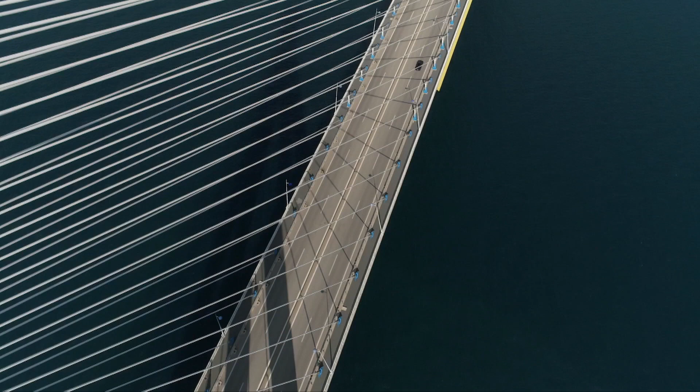Reaching the world on the other side, crossing the bay. First a curiosity, then a necessity, one which has urged man from the dawn of his history to develop construction methods that enable him to cross barriers. But bridges are more than just technological feats. They are links between men.

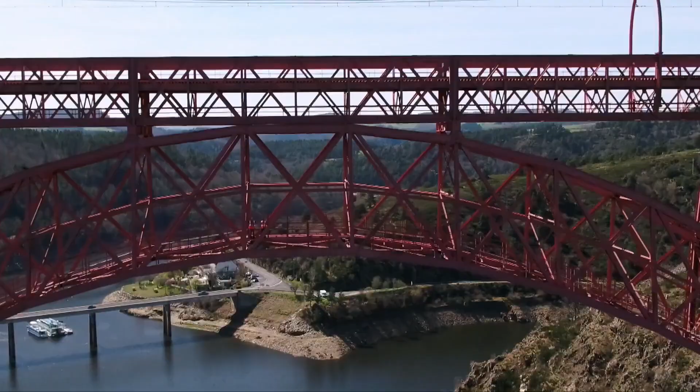Leah Bello is a geophysicist. She'll be following in the footsteps of exceptional builders, revealing the secrets behind the construction of iconic works, and discovering the challenges faced by engineers who build even higher and even further.

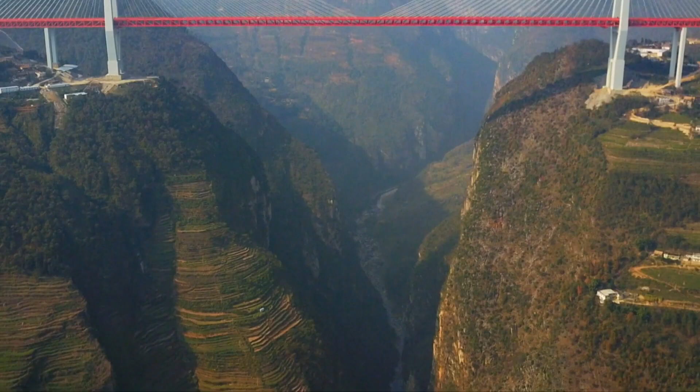No engineer in his right mind would have chosen this place to build a bridge. Unfortunately, that was where a bridge was needed. A scientific investigation to discover how men design and construct civil structures. True expressions of human genius to bridge the gap.

Leah Bello first heads to northeast India and the state of Meghalaya to discover a hidden treasure. Located on the border with Bangladesh, a third of the state is covered by dense, damp forest. Numerous streams wind through the valley, representing obstacles for the movements of the villagers. For almost 500 years, they have intelligently tamed nature by building bridges, using the roots of living trees.

Be careful, it's very slippery. Slowly. Here is the bridge for you, the living root bridge. See the roots. It's like something out of a fairy tale. Is the bridge still in use? Every day. Every day we have people living in the village on the top. They come through this to go to their garden.

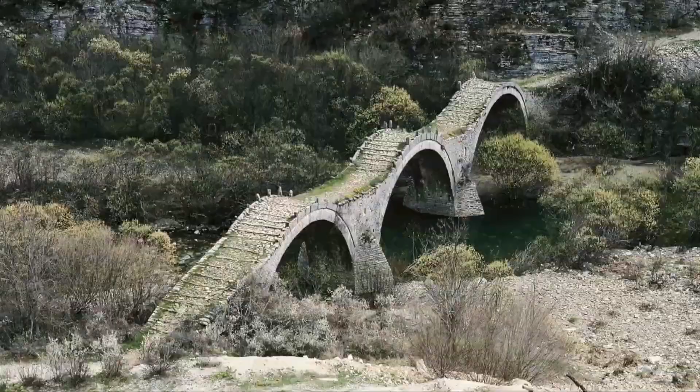For almost 5 centuries, the Roman Empire reigned over Europe and the Mediterranean. To expand their territory, the Romans developed an important network of roads and bridges. This construction-minded people built numerous large-scale structures in stone, some of which are still standing after 2,000 years, like the Pont du Gard in the south of France, which was constructed in the middle of the 1st century of our era.

Its dimensions are impressive, 48.8 meters high, with a span of 275 meters. This iconic vestige is the highest elevated Roman aqueduct bridge in the world. From the bottom up, its 3 tiers have 6, 11 and 35 arches respectively. Vaulting has been used since the Mesopotamian period, but not all the time. The solution discovered by the Romans was to build semicircular arches with centering, with the lateral thrust exerted on piles with very strong foundations. This produced much wider arch spans, from a few meters to 35 meters across.

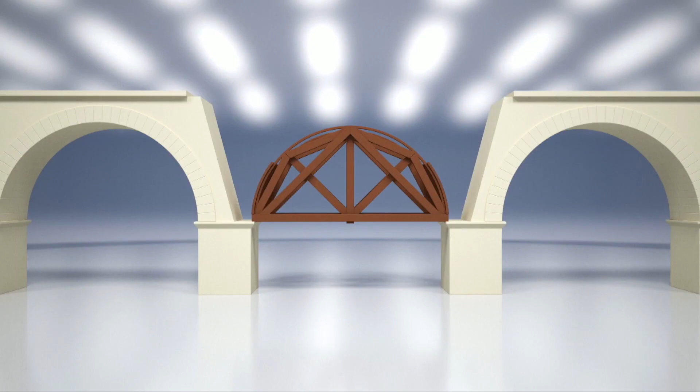Once the piles were sunk into the riverbed, the next task was to construct the archways. The semicircular vaulting forms a structure which can span an empty space with successive arches. To build the arches, a solid support was needed, known as a centering. This constituted 2 wooden semicircles with the same form as the intended arch and served as the framework. The blocks of stone were then laid on top of the wooden centering until the last one, the keystone.

On the first tier of the bridge, the arches were thus formed with 3 parallel sections of stones. This form allowed the Romans to build arches with unprecedented spans. But it did have its limits. If an arch were to span more than 40 meters, the quantity of stone would be too heavy and the vaulting would collapse under its own weight.

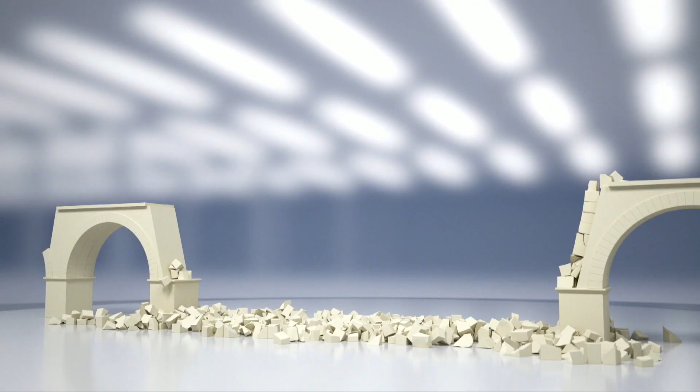It's often said that the Romans were the greatest builders in antiquity. But what do we know about the exact construction techniques and methods they used? We know a huge number of things, but not everything.

Firstly, their construction techniques were absolutely remarkable. Their level of engineering clearly surpassed that of the ancient Greeks, who were also great engineers. And Vitruvius, the Roman architect and engineer, left us the only known book on the subject, which we can now consult for all our studies of the archaeology of antiquity.

Vitruvius was the author of the only surviving treatise on the architecture of antiquity. It's an exposé of the art of Roman construction, and it lists the tools and techniques employed by these master builders. From a theoretical point of view, we learn of their acute sense of proportion. The lines of their buildings form harmonious dimensions and employ incommensurable numbers such as pi or the square roots of 3 and 5.

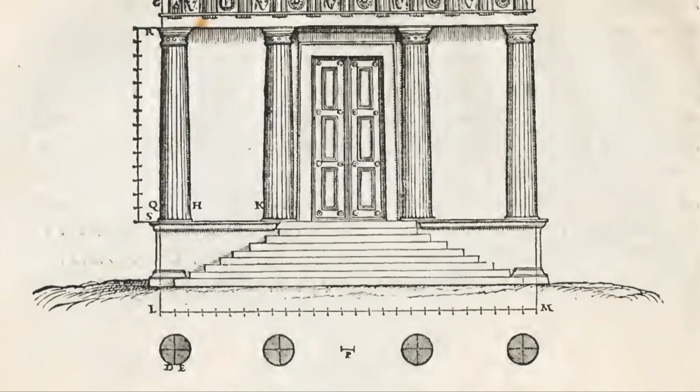The Romans set out to construct for eternity. Their use of infinite numbers actually enabled them to obtain the absolute. And also, thanks to this geometrical system, stonemasons also knew the methods perfectly. And so they could reproduce on the spot, on a much larger scale, of course, the plans which had been drawn by the architect.

While the Pont du Gard remains a model of aestheticism and architectural perfection, it was actually constructed for a very precise purpose: to bring fresh water to Nîmes, one of the largest cities in Gaul, with 20,000 inhabitants. The spring chosen was the Fontaine d'Eure, some 50 kilometers away from Nîmes.

The distance wasn't a problem for the architects, but something else was. They had hoped to find a spring much higher up than the arrival point. But unfortunately, the Fontaine d'Eure was only 17 meters higher. That meant the builders had to construct an aqueduct with an extremely gentle slope, one of the gentlest in antiquity. How gentle was it? 24 centimeters per kilometer.

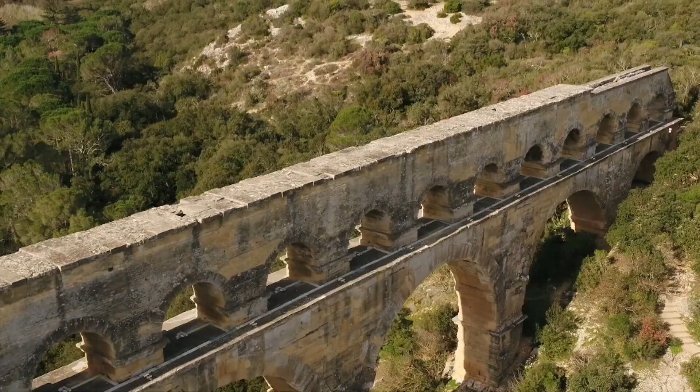A gradient equivalent to only 1 millimetre every 4 metres. And without expert calculations, it was impossible to ensure a regular slope along the full 50 kilometres of the aqueduct, especially across the Pont du Gard. That means that you have a channel with a slope like this, fairly steep, followed by a very gentle slope, and then another steepish one. So in the central part, the bridge, water flowed much more slowly.

So the result is the water rose in the channel, and once the aqueduct was in service, they realized that it overflowed from the Pont du Gard. So the original wall only came up to here, and to stop the water overflowing, they had to build up to here? Exactly. This masterwork of antiquity supplied Nîmes with water for almost 500 years, until the fall of the Roman Empire.

The construction of immense architectural and engineering works disappeared with the Dark Ages and was only resumed 500 years later, in around the year 1000, with the expansion of Christendom and the power of the Church. The builders of the Middle Ages readopted the techniques and methods of Roman architects. Over the following centuries, some bridges were remarkable because houses and shops were constructed on them. Most of these have disappeared, such as the Old London Bridge and Notre Dame Bridge in Paris. But others have valiantly survived, like the Rialto Bridge in Venice and the Ponte Vecchio in Florence.

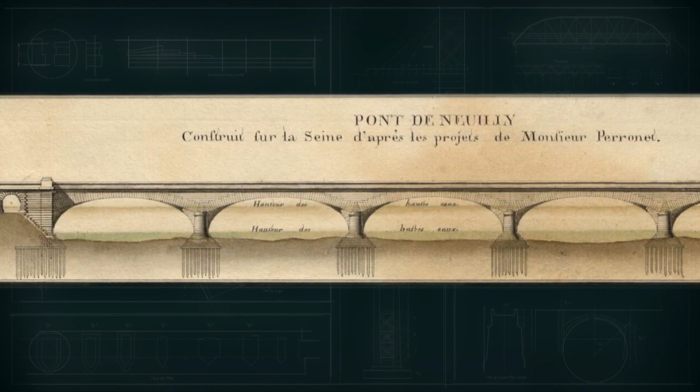He developed an understanding, somewhat systematic one could say today, of how bridges functioned. So he built bridges in a different way to traditional ones. With his bridges, the thrust of each span kept the others in equilibrium, unlike the Pont d'Avignon, where if one arch collapsed, others might yield. The arches of the modern bridge were much more interlinked, and the thrust went from arch to arch right to the abutments. Stone thus dominated the history of bridges until the Industrial Revolution.

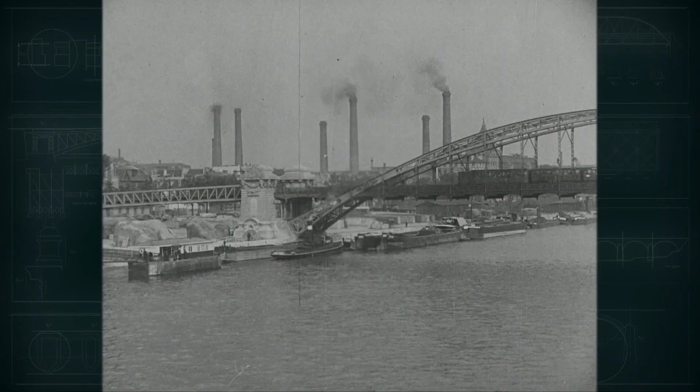In the late 18th century, early 19th century, the mastery of iron allowed engineers to design structures with new profiles. Iron was the great revolution for bridges. It was about 60 times more resistant to pressure and thrust than stone, and that would lead to considerably lighter structures. Iron resisted tensile strength as well as pressure. That meant that architects could finally drop the arch, which had been the dominant form of bridges since Roman times.

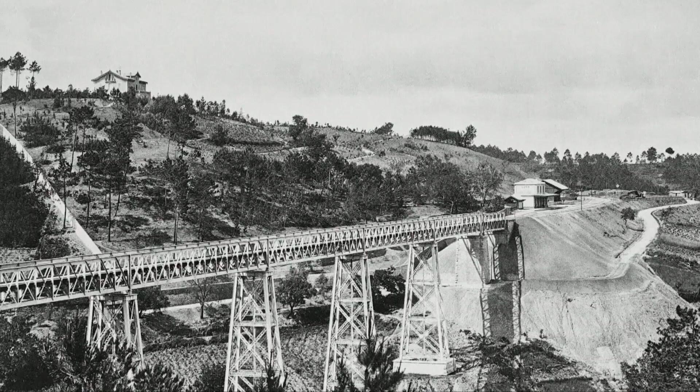Iron enabled builders to construct bridges with triangular crossbars. Both lighter and more resistant, bridges could span even greater distances. The rapid development of the railways demanded new technological solutions to cross rivers and valleys. Engineers stopped at nothing, like spanning the deepest gorges where no one had ever dreamed of taking on nature, and bridging the gap.

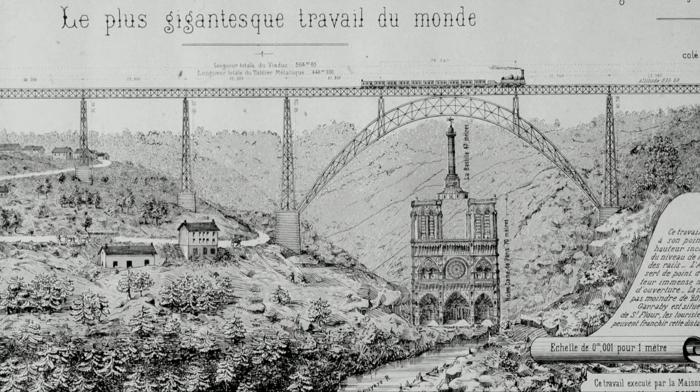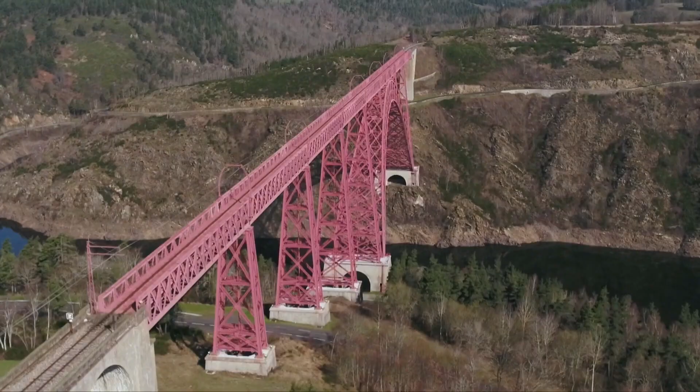The Garabit Viaduct is a striking example of this daring. It was designed by Gustave Eiffel, a visionary engineer and determined architect, whose solid yet elegant bridges reached heights that gave his contemporaries vertigo. Located in the heart of the Massif Central, the Garabit Viaduct crosses extremely undulating terrain. 565 metres long and 120 metres high, the rail bridge rests on 7 piles and a single main arch with a span of 165 metres.

What was there here before the construction of the bridge? Nothing. At Garabit, absolutely nothing. They had to lay new roads just to get to the site. Then they had to construct accommodation for the men who would work on the viaduct. Why construct a bridge where nothing existed? So that the train, with its passengers and goods, could reach the region. As rail was developing everywhere in France, there was still no line through the Cantal department linking Paris directly with Béziers, without skirting around the Massif Central.

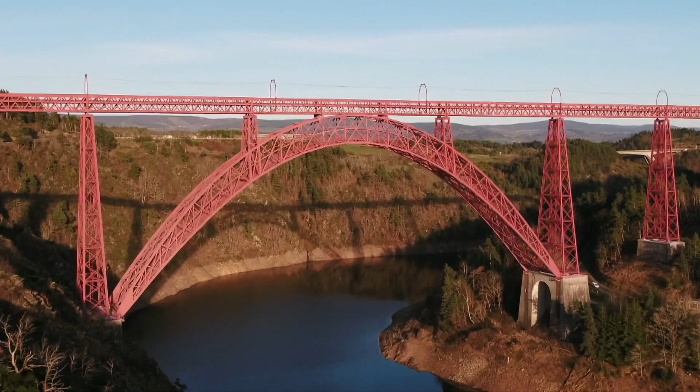Here it is. Wow. The gigantic worksite began in 1880. The viaduct was erected in just 4 years, an incredible technological feat for the time. Keep going. Almost there.

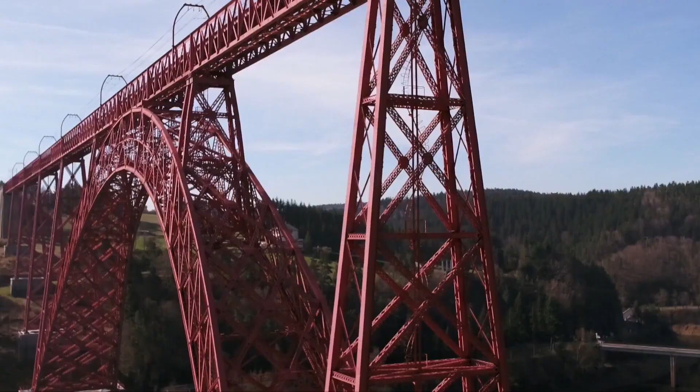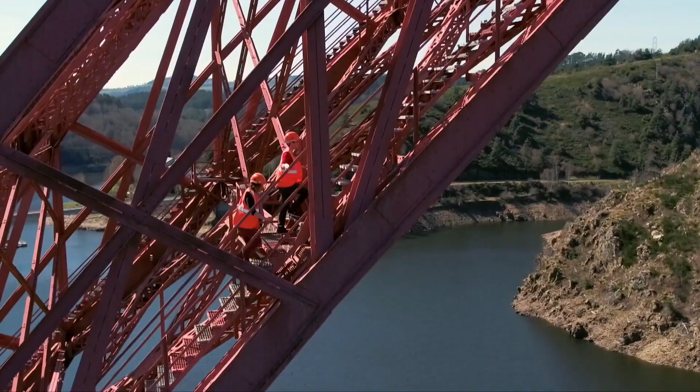The Garabit Viaduct was the testbed for revolutionary technology, and it was while constructing this bridge that Gustave Eiffel patented his famous lattice girders, used several years later for the Eiffel Tower. The structure is mesmerizing. Totally fascinating. And in the signature Eiffel style, with the open lattice girders. Which allows the wind to pass through. That's right. It's a very airy structure.

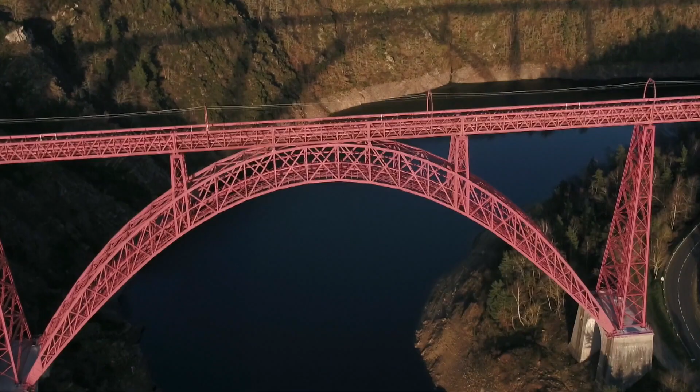How was it constructed? Was the whole thing just assembled here? Half of it was pre-assembled in the workshops in Levallois-Perret near Paris. The other half was hot riveted together here in Garabit. The wrought iron girders were assembled with rivets, these small, shafted iron fasteners inserted between each piece of the structure. Once heated to red or white hot and the tail of the rivet has been hammered flat, they hold the pieces together when they cool.

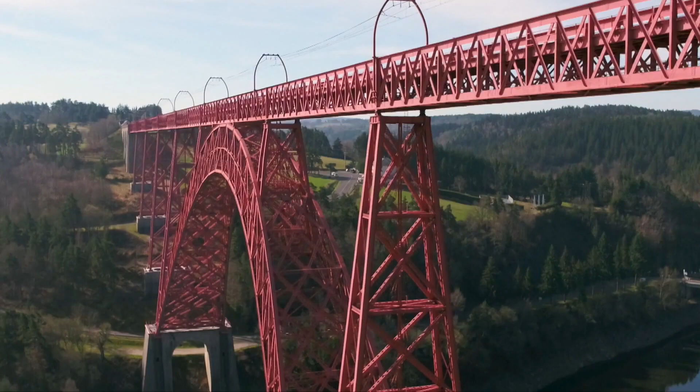Once the bridge was finished, it must have been a huge event for the region. Yes, and not only for the region, but the whole civil engineering world. The bridge was marveled at, due to its height, as far as the United States. It's one of the 2 most talked about works by Eiffel among the 100 he built around the world. The Garabit Viaduct and the Eiffel Tower, erected 4 years later, are testaments to Gustave Eiffel's genius and perfect mastery of iron.

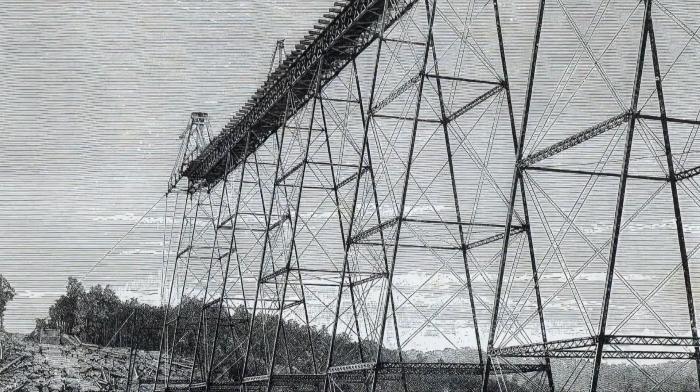Iron dominated the history of bridges in the late 19th century. Constructions multiplied throughout Europe and the United States. But few engineers understood how iron, and notably cast iron, would react over time with the constant crossings of trains. Often hastily constructed, bridges became the stage of some terrifying disasters. In the United States, almost 200 of them collapsed in the 1880s. These repeated accidents marked the end of the iron bridge.

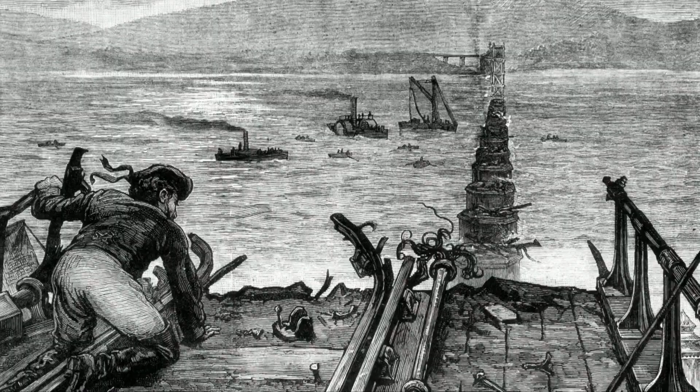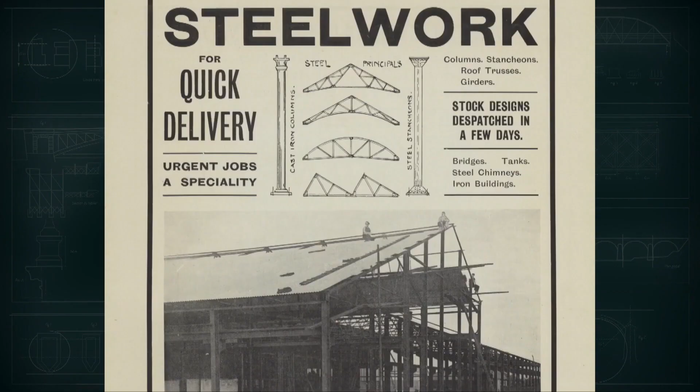Engineers turned to a new, much more resistant material, steel, an alloy of iron and carbon, the development of which took metalwork from the domain of craftwork into that of science. One, high-quality steel has far superior mechanical qualities compared to iron, so you can go much further with it. Two, it had a big impact from the early 20th century on because, unlike iron, it could be welded, and that would totally transform assembly technology. Today, no one would even imagine building a large work of engineering without steel.

Steel opened the door to rapid technological progress. Across the globe, sleek-looking bridges sprung up across rivers, breaking records with spans of several hundred metres, like the Forth Bridge in Scotland.

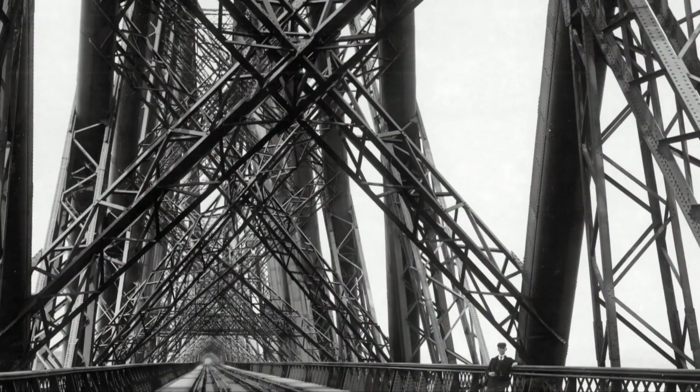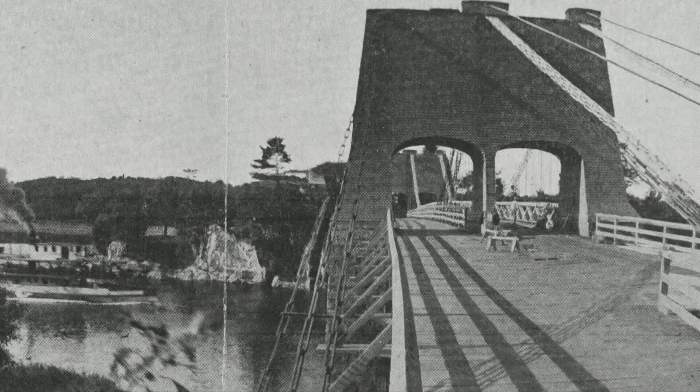Back to the early 19th century, another method of construction was born in the United States: the suspension bridge. Bridges where the road deck is hung below wire suspension cables, firmly anchored in abutments on the riverbanks. The suspension bridge is a very simple idea and it's not that complex to construct. The main thing back then was to make sure the steel used in wire cables was of good quality so that they wouldn't snap. There was a lot of debate because for a long time bridges were suspended by chains, then by cables, then by modern groups of cables.

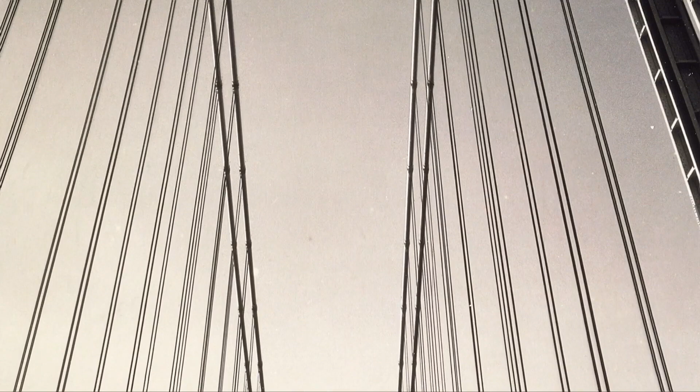With cables made of steel, suspension bridges became all the rage. But it was the daring of a German-born engineer which would give the United States one of the wonders of the modern world: the Brooklyn Bridge in New York.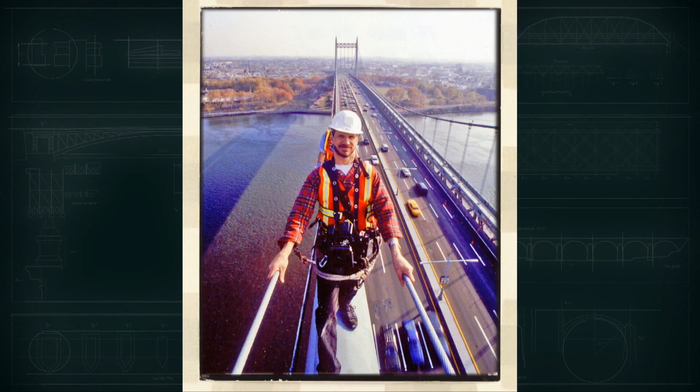To better understand how this bridge changed the history of engineering and that of New York, Leah Bello joins Dave Frieda on the banks of the East River. This photographer, a specialist in bridges, is a fountain of knowledge when it comes to the Brooklyn Bridge. This legendary bridge, 1,825 metres across, beat all span and height records. Construction started in 1870, giving rise to an era of ambition and sacrifice of an entire family: the Roeblings.

John Roebling, who designed the bridge, unfortunately didn't have a chance to see his bridge completed. He was surveying the footings for the bridge on the south side of the Brooklyn Tower. A ferry had come in, he didn't see it, and it crushed his foot. And the only treatment he wanted was pouring water on it. Unfortunately, he died of tetanus. So his son, Washington Roebling, then took over as chief engineer. So Washington was the one who actually built the bridge.

He went down into the caissons to help the men dig out the muck and the rocks below. He wanted to be part of the team. But they didn't know, again, about caisson disease, about the change in air pressure. He wound up being laid up in his bed, in his bedroom, so his wife, Emily Roebling, then transferred all the information from him, Washington, to all the workers.

So Emily Roebling was very instrumental in helping build the Great Brooklyn Bridge. She was one of the first woman civil engineers that really helped. What she did was absolutely incredible. I think without Emily Roebling, you wouldn't have the Brooklyn Bridge today.

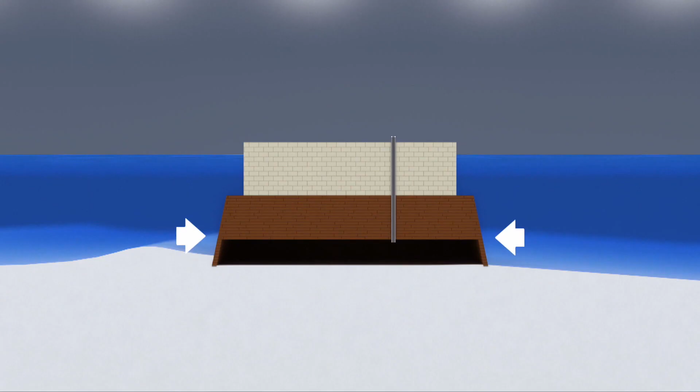In this damp, cramped, pressurized space, laborers dug for several months in order to anchor the piles in the bedrock. The rubble and mud rose to the surface via a central conduit. And within only 4 years, the 2 towers had begun to rise from the East River. At the time, little was known of the effects of pressure on the human body. Contractors and workmen began to suffer from strange illnesses.

The caissons on the Manhattan side were at 30 meters deep, which means the pressure inside would have been 3 times more than surface pressure. That must be what made it so dangerous for the men working inside when they returned to the surface. Yes. Now, I used to scuba dive, so I know the dangers of decompressing. If you come out to ambient pressure too fast, it's like opening a soda bottle. Open the top too quick, the gases come out too fast. That's the same thing with the nitrogen in your blood.

It would come out, it settles into the joints, it's extremely painful. So they now know you have to come out into ambient pressure very slowly. They didn't know that back then, so they called it caisson's disease because almost everyone that went into the caisson came out in extreme pain. A lot of men died.

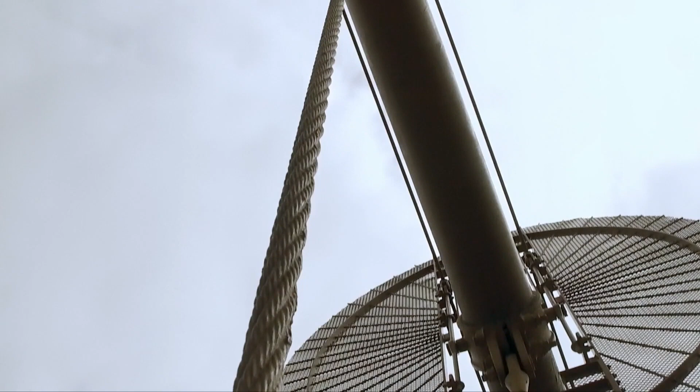Despite the numerous challenges, the 90-meter tall towers were completed in 1875, and the installation of the cables could begin. These are the 4 main cables. These main cables are what holds up the road deck. Each cable contains wires like this. 5,434 wires make a 15 3/4 inch cable. Each cable can withstand the pull, tension of 25 million pounds. They were anchored in anchorages on both sides of the bridge.

The main cables are original. Some of the engineers I know worked on the bridge, and the cables, which are made of wire like this, are in great condition. They're galvanized. This is the first suspension bridge in the world to use galvanized steel wires. It's steel coated with zinc. Zinc oxidizes, but it doesn't rust, and it protects the steel underneath it. So this could last for 200-300 years, easily.

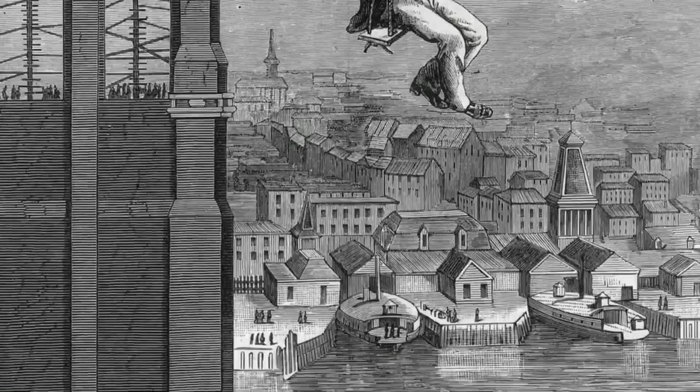To prove the solidity of the cables, master mechanic E.F. Farrington crossed the East River suspended from them. In all, 23,000 kilometers of cables were installed.

After 13 years of work, the bridge was finally completed. Its inauguration on May the 24th, 1883, was a national event. All of New York was invited. The president was here. The mayor was here. It was called Decoration Day. The entire city basically shut down to celebrate the opening of the Brooklyn Bridge.

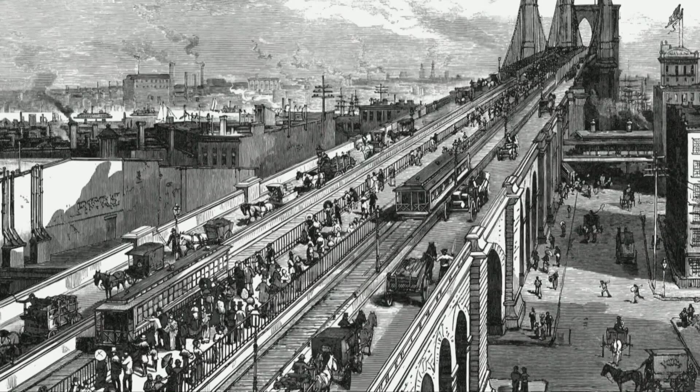A week later, there was what's called the Bridge Stampede. Someone had tripped on Decoration Day a week later, and people thought the bridge was collapsing, and a lot of people were trampled to death, unfortunately. So to compensate for that, P.T. Barnum had a whole herd of elephants walk across the bridge. And that proved to the public that the bridge was very safe.

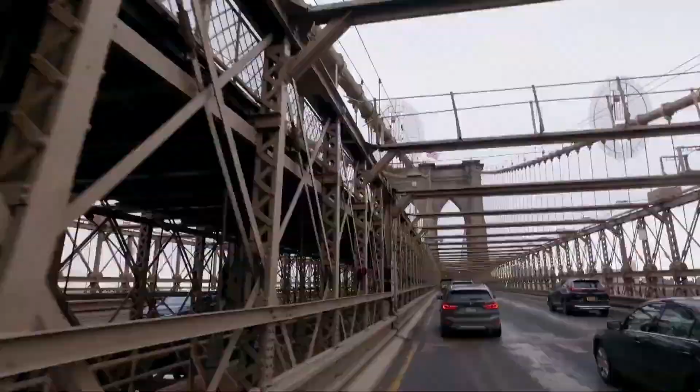I believe this bridge can last for centuries. It is a marvel of engineering. Hopefully many future New Yorkers and other people around the world will be able to see this great structure. The Roeblings' Brooklyn Bridge is now known the world over and is one of New York's most iconic landmarks. Over 130 years later, it's still standing, a genuine work of prowess, given the know-how of the time.

It inspired other famous large bridges, like the George Washington Bridge on the other side of Manhattan, and the Golden Gate in San Francisco. But other bridges have proved less long-lasting. The first Tacoma Narrows Bridge in the state of Washington would collapse under the effects of a suspension bridge's main enemy, the wind.

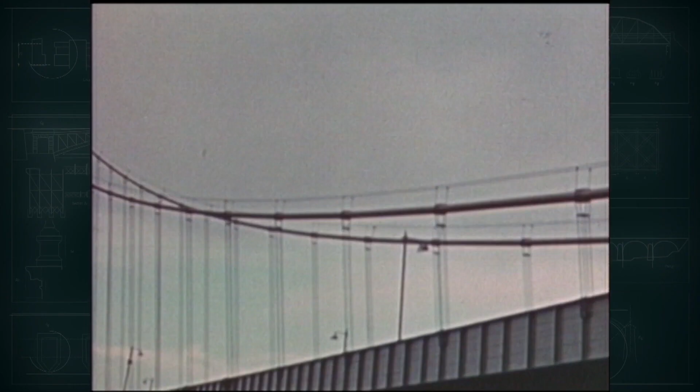Last July, the nation hailed the opening of the new $6.5 million Tacoma Narrows Bridge over Puget Sound.

This is the opening of the Tacoma Narrows Bridge, right? Yes, it was inaugurated on July 1st, 1940, and the bridge started oscillating up and down from the outset. During the summer of 1940, people visited the bridge just to see it swaying. It became a tourist attraction. And it became famous. Yes, from the very beginning.

Except that in November, there was the first storm of the fall. It wasn't a big storm, but there were winds of 70 kilometers an hour through the strait. And instead of oscillating up and down, the deck started to twist. From one side to the other, there was an amplitude of almost 9 meters. And after an hour, at about 11 o'clock in the morning, the whole central section gave way and collapsed into the Tacoma Narrows.

Oh yes, there it goes. Which leaves us with a marvelous example of how not to build a suspension bridge. One of America's finest structures.

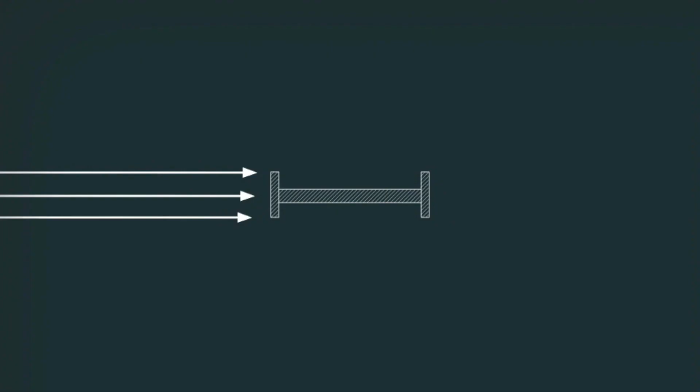Fortunately, the collapse of the bridge claimed no victims, except for a terrified dog locked in the car in the middle of the bridge. Not a person was lost, but it's a real tragedy. When the wind blew on the Tacoma Narrows Bridge, air pressure was exerted on the edges of the deck, transferring its energy into the structure itself and causing the roadway to bend and sway.

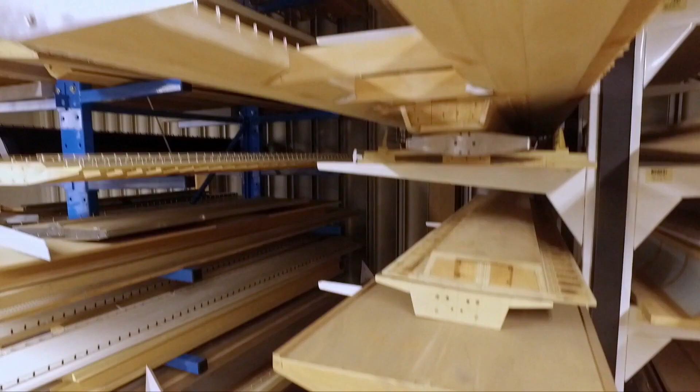After the collapse of the bridge, architects and engineers began to study much more deeply the impact of the wind on bridges. But it wasn't until the 1970s that aerodynamics became a science in its own right. From then on, the decks of bridges were streamlined to facilitate the flow of air around the structure, so as to prevent any risk of swaying.

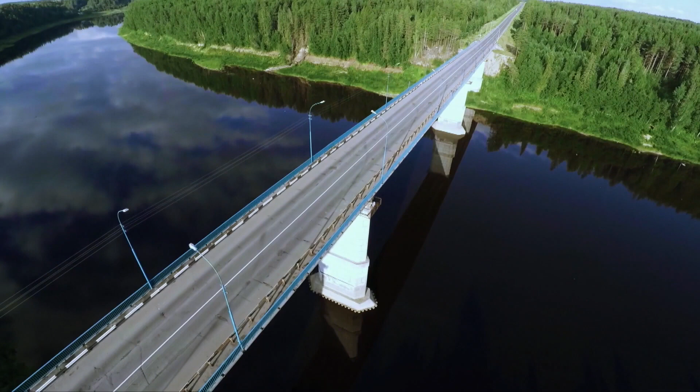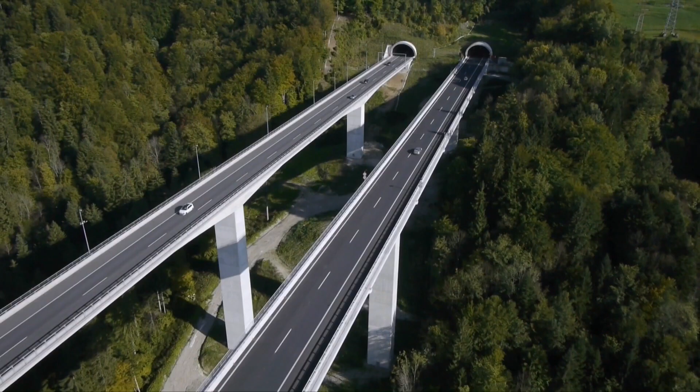With the invention and mastery of new materials during the 20th century, man would be able to build longer, higher bridges with even more impressive dimensions. It was the age of concrete, the king of bridge building, and much cheaper than steel. And it would benefit from a revolutionary process developed by French engineer Eugène Freyssinet, which was perfect for civil engineering works: pre-stressed concrete.

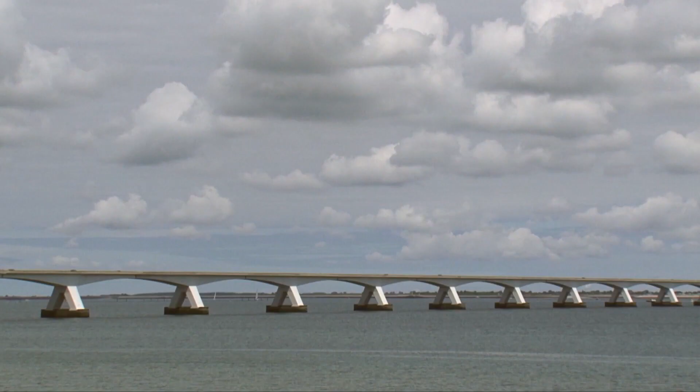Pre-stressed is concrete that has been compressed so that the traction exerted on it is more than compensated by the stress exerted on it. For example, if you make a beam out of sugar cubes, it won't resist traction at all. But if you compress the cubes, you can then place a small object on them, say an eraser, and the sugar beam will hold firm, because the disintegrating effect produced by the eraser's weight is nullified by the fact that the cubes are more tightly packed together.

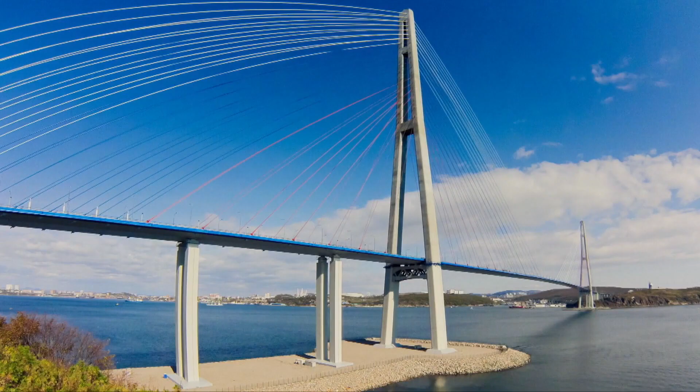This new material has been used on most of the bridges which stand today, and it will be used in hybrid bridges, such as cable-stayed bridges, constructed with a mixture of concrete and steel. A cable-stayed bridge doesn't need the expensive anchoring of the suspension bridge because the deck is no longer suspended from a gigantic main cable, but supported by a series of individual cables running directly from the pylons.

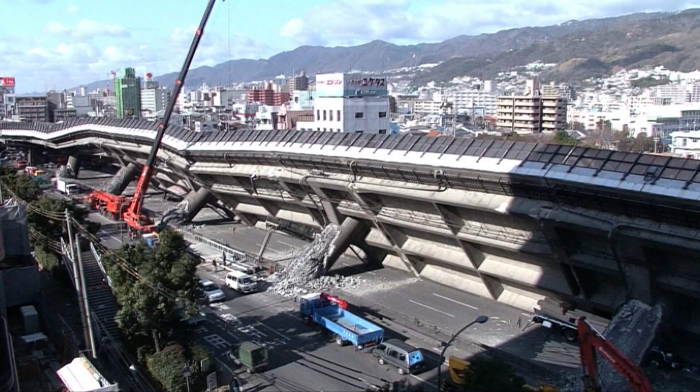This new model spread across the globe in the second half of the 20th century, breaking all kinds of records, like in 1995 with the Pont de Normandie and its span of 856 meters. Nothing seemed able to halt the ambitions of architects and engineers. Not even the wrath of nature, which has managed to destroy a number of their bridges, like during the earthquake in Kobe, Japan in 1995.

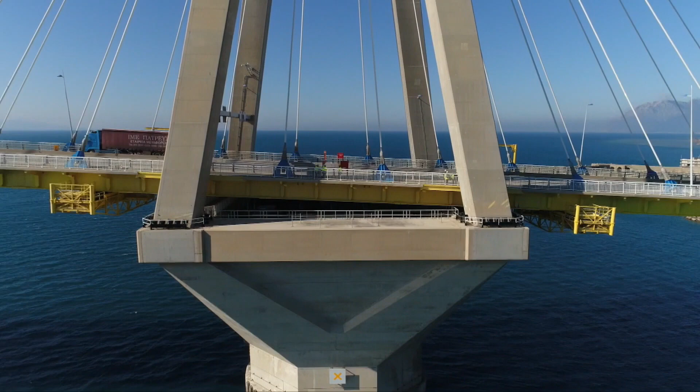Across the Gulf of Corinth stretches the Rio Antirio Bridge. It links the Peloponnese to mainland Greece at a point where 2.5 kilometers separate the two shores. The region sits between two tectonic plates, making it one of the most seismic in Europe. No engineer in his right mind would have chosen this place to build a bridge. Unfortunately, that was where a bridge was needed.

Project director Jean-Paul Teyssandier worked for over 5 years with overseeing engineer Gilles de Maublanc. Together, they came up with unprecedented solutions. The first difficulty was the depth of the water, 65 meters. That's no longer the field of bridge building, but of offshore engineering. Secondly, the seabed was of a very poor quality. And thirdly, there are faults that are constantly active, meaning the distance changes between the two coastlines. And during a strong earthquake, there could be a sudden change of several meters.

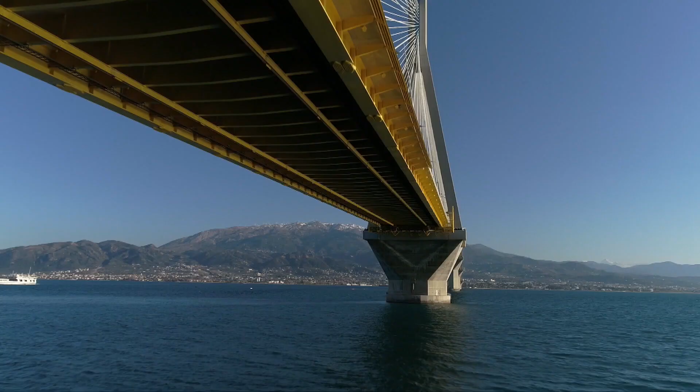When we discovered the scale of the work, we were sorely tempted to close the file and refuse it. At the same time, we liked the idea of facing a massive challenge, and we thought there must be a solution. The bridge has to be capable of withstanding earthquakes of up to 7 on the Richter scale. So the main challenge was to lay sufficiently solid foundations to ward off the wrath of the earth. But preliminary studies showed the seabed to be particularly unstable.

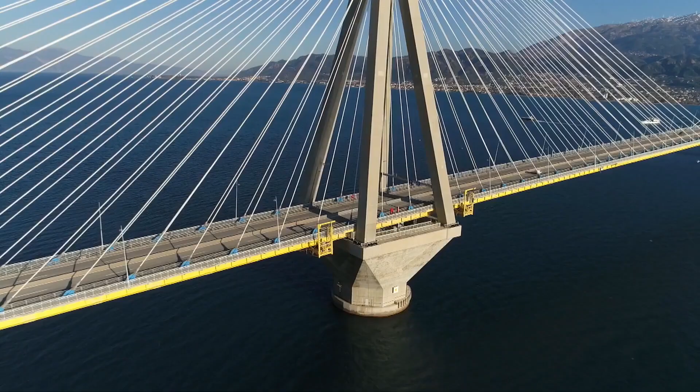With the poor quality of the seabed, our first idea was the classic one, to dig down to find better quality ground. But after detailed analysis, we soon found out that the bedrock was at a depth of about 1,000 meters. So that was totally unfeasible and unrealistic. Then, after doing a lot of research, we came up with a totally innovative concept. Due to the extreme depth of the bedrock, the engineers soon abandoned the idea of laying foundations under the seabed. Instead, they decided to consolidate it using a brand new solution.

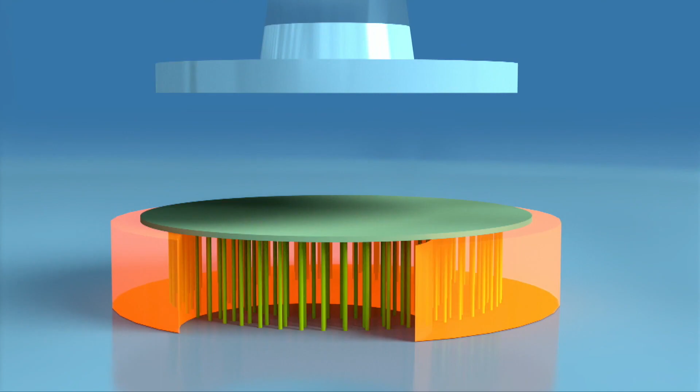Each of the 4 huge pylons rests on groups of 200 hollow steel pipes driven into the bed. The pipes measure 25 to 30 meters long, with a diameter of 2 meters. These were then covered with a bed of gravel, 3 meters thick, on which the foundations, called pier footings, simply rest. The dimensions of the footings are gigantic. Each is divided into 32 compartments and has a diameter of 90 meters. They remain the biggest pier footings ever constructed.

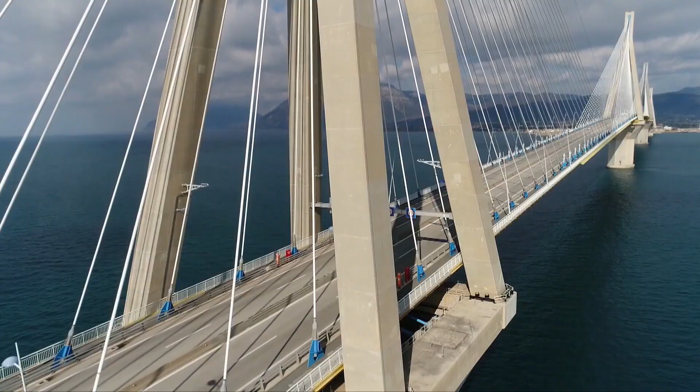The Rio Antirio Bridge has another particularity. Rather than lower and upper pylons, there are pylons of a single block of concrete. The suspended deck is continuous from one end to the other. It passes between the pylons and is suspended by only 368 stays. It's a genuine floating roadway. So in case of an earthquake, it can gently sway. And to prevent the deck from hitting the pylons, the engineers had to come up with an ingenious system to stabilize the bridge.

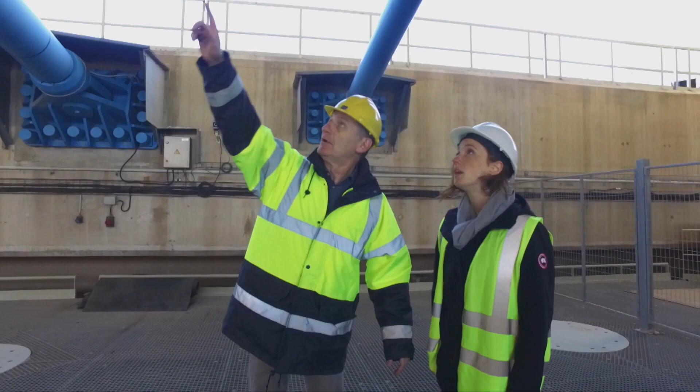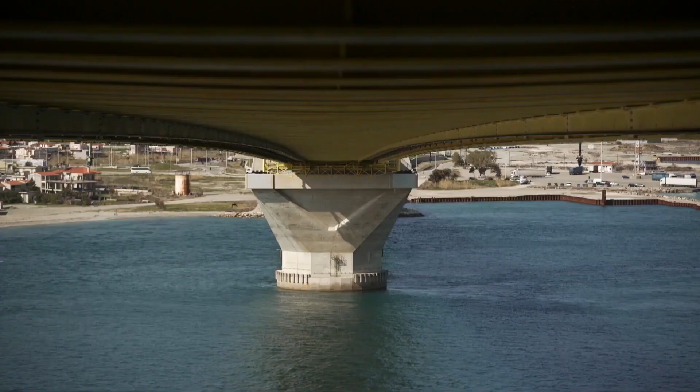Let's start with the big central tube. It's a rigid tube, which holds the structure transversely in high winds. But for a major earthquake, which can't be withstood by the rigid support, there's a fuse inside which breaks, allowing the small tube to enter the big one. So 1, 2, 3, 4 shock absorbers come into play. Very similar to the shock absorbers in your car. When you go into a hole, they absorb the energy. Beneath each of the pylons, the deck is maintained by this system of fuses and 10-meter-long shock absorbers. And over 400 different measuring instruments monitor the bridge's movements in real time.

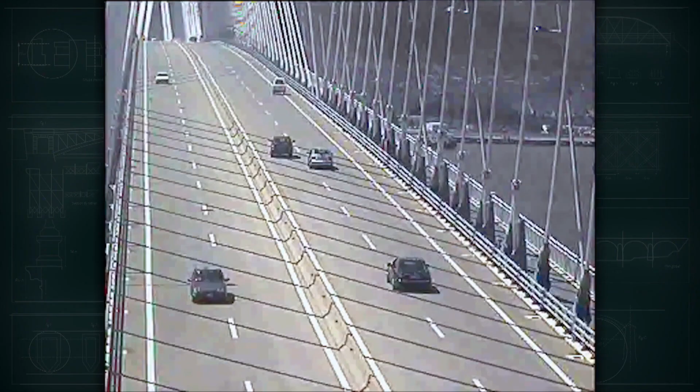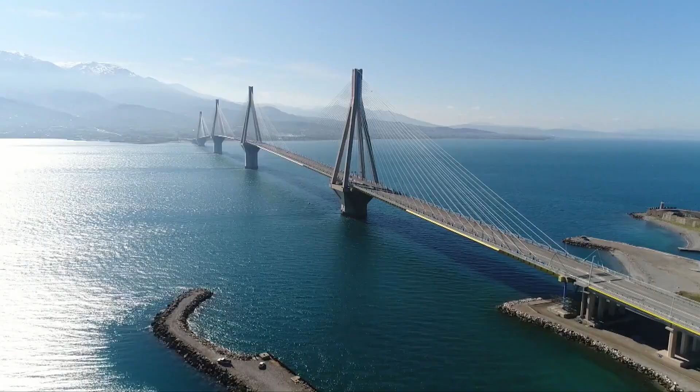On June the 8th, 2008, the screens suddenly went berserk when an earthquake of 6.5 magnitude struck the south of Greece. During the 2008 quake, things went according to plan. The connections broke, the shock absorbers absorbed the shocks, and the deck was allowed to sway freely. So it was a genuine life-size test of whether our project was well-founded or not. Thanks to the shock absorbers, during an earthquake, the deck can move laterally 3.5 meters without hitting the pylons. Rio-Antirrio is an extraordinary bridge. Extraordinary because it's a bridge implanted in an extraordinary environment.

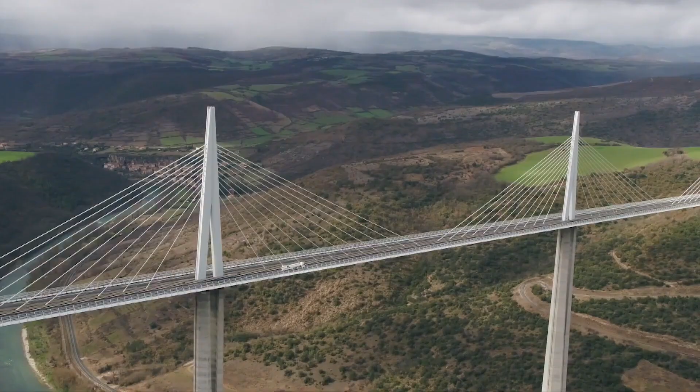Every bridge marks a victory over the elements: earth, water and air. And a number of them are veritable feats due to the uniqueness of the terrain they cross. In the majestic gorge valley of the River Tarn, in southern France, the Millau Viaduct has become the new world record holder of bridges, with its 2,460-metre cable-stayed deck 275 metres in the air. It was constructed to free Millau of a curse: its constant traffic jams. But to reroute the highway, the new road would have to cross one of the deepest gorges in Europe, with a width of 2.5 kilometres.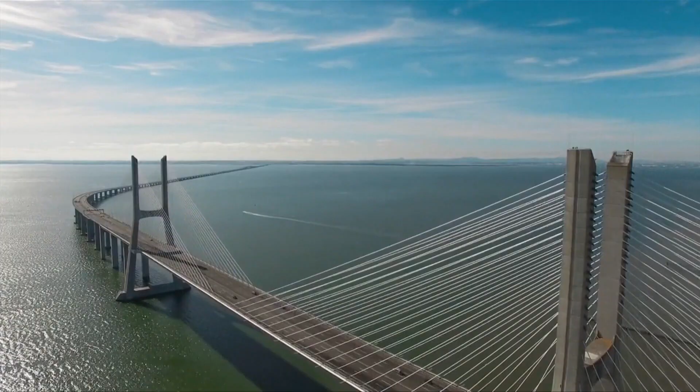Michel Virlogeux is a graduate of France's top engineering school, the École des Ponts et Chaussées. He has worked on almost 200 bridges during his career. He's known as the father of the Pont de Normandie and participated in the design of the Vasco da Gama Bridge in Lisbon, Portugal. At Millau, the complex geography of the valley was for a long time a real brain teaser for the engineer.

Several routes were envisaged because we had to cross a large network of valleys. At the outset, the elevated solution, going from plateau to plateau, didn't come to mind because of the necessary height of the pylons. And then an expert road construction engineer said to us, "Why don't you stay up at the same level as the plateaus?" And we thought we're stupid, that's what we have to do. Never had engineers built so high up.

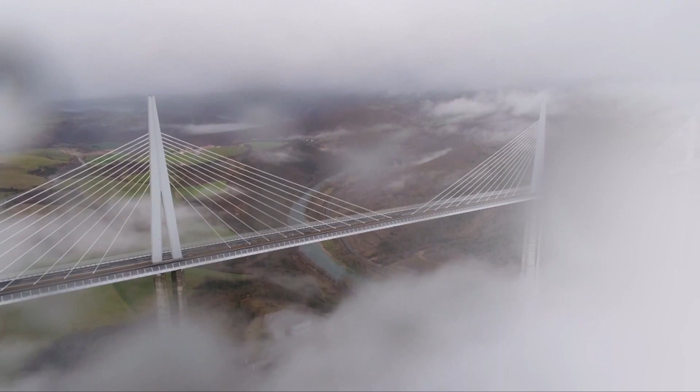Once the route was decided, the designer then had to imagine the profile best suited to the landscape. My idea was to construct a cable-stayed bridge with multiple spans. Why? Because for the bridge to be slender and transparent, cable stays would be the best. Plus, it's also the most effective structure to bear the load, allow larger spans and thus fewer pylons.

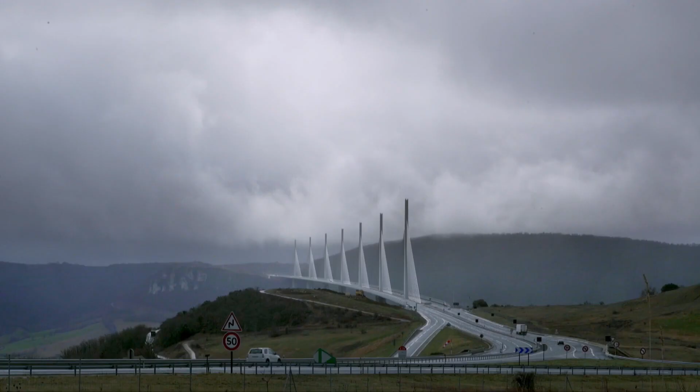With British architect Norman Foster, Michel Virlogeux's team worked on finalising the plans for the viaduct for almost 10 years. Work finally began in 2001. A gigantic worksite on which Marc Buonomo worked as the engineer who oversaw the building of the metallic roadway. You feel tiny. Yes, you do. How many metres up is it? From here to the top, 245 metres. 245 metres. It's the tallest pylon in the world.

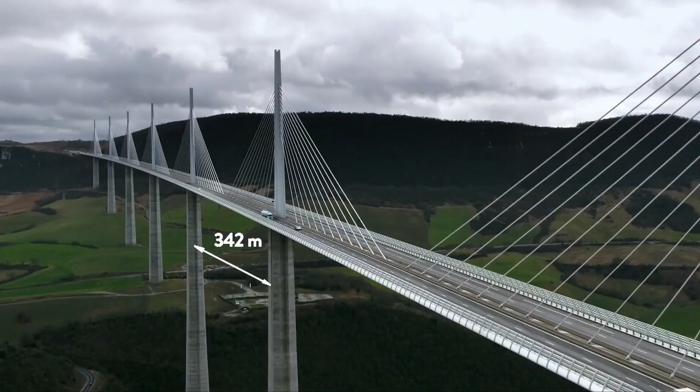With its 2,460-metre long deck, the Millau Viaduct is one of the longest cable-stayed bridges in the world. It rests on 7 pairs of piles and pylons, 342 metres apart. The bridge reaches a maximum height of 343 metres, making it taller than the Eiffel Tower. What's the width at the base of the pylon? The base is the size of a tennis court, and the concrete is 5 metres thick. Underneath, there are 4 big piles, 18 metres deep and 4 metres in diameter. And all that anchors this pylon in the rock below.

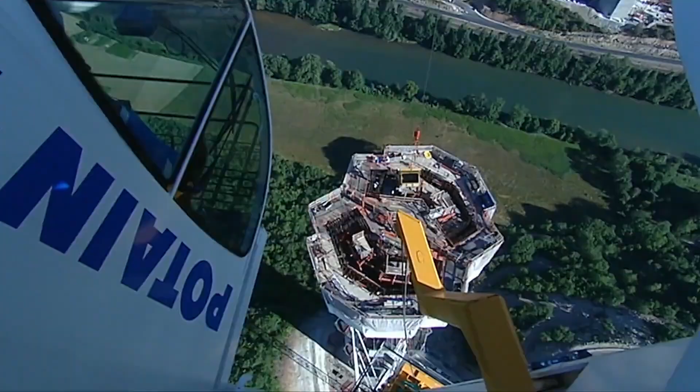During work, the 7 pylons were built at the same time to gain in speed. Each was given its own crane to pour in concrete. The pylons grew 4 metres every 3 days. In December 2003, 2 years after the construction began, the pylons were complete. Each of these splits in 2 for the last 94 metres. A characteristic shape that wasn't chosen by chance. A bridge, even when constructed to take limited deformations into account, remains extremely supple. So we had to choose a shape for the piles and pylons to give them the necessary rigidity to restrict deformations, while also allowing longitudinal dilations of the deck due to variations in temperature.

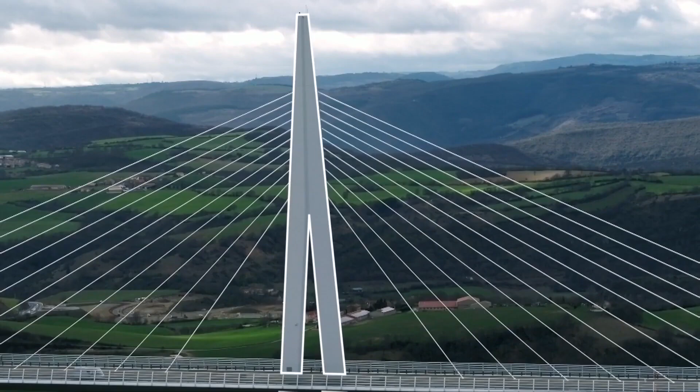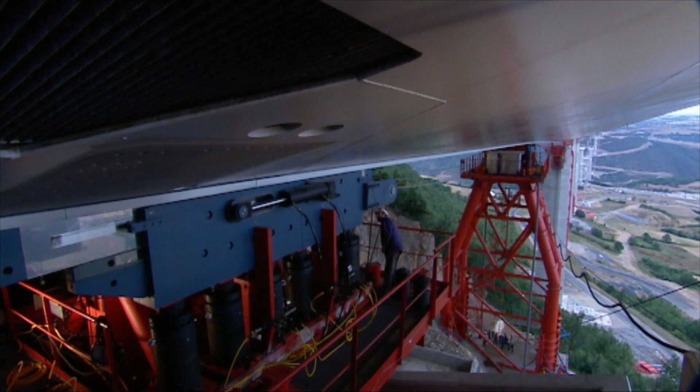The entire deck was constructed on the ground, in workshops, on the plateaus either side of the bridge. 150 men, aided by robots, carried out over 1,000 kilometres of welding to assemble the steel roadway. How did you manage to get the structure in place? I came up with the idea of pushing it into position. Not a classic form of pushing, because the pylons are so high. The tallest is 245 metres. Plus, they're very flexible, so they wouldn't have resisted classic pushing. So we invented a sliding system with wedge conveyors, our famous wedges.

Each conveyor was made up of 2 wedges, which slide over each other with the use of jacks. The first lifting wedge slid under the second, supporting the roadway. This second wedge was then raised 2 centimetres, and as it was no longer resting on the piles, it could advance. Once in position, the first wedge slid again, the conveyor was back to its original position, and the cycle could recommence to advance the roadway 60 centimetres by 60 centimetres. Thanks to this system, the only one of its kind in the world, the north and south sections of the deck joined up in May 2004 after 15 months of sliding.

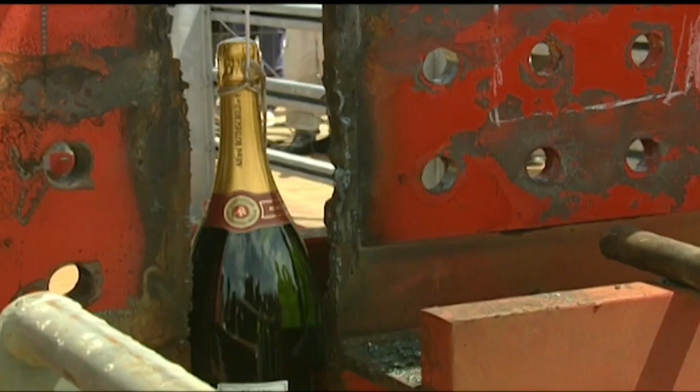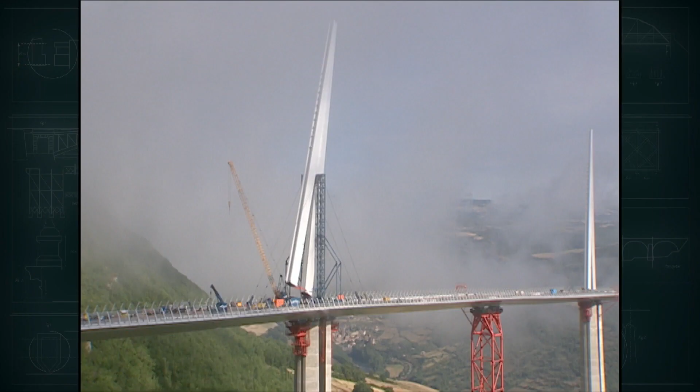To get the pylons upright, the engineers sought inspiration from ancient techniques and developed a tailor-made lifting system. They basically copied the model invented by the Egyptians to raise their obelisks at Luxor. Constructors must know all the techniques used for at least the past 4,000 years, whether they're Egyptian, Roman, 19th century, 20th century. When you mix all that together, you can build great works of civil engineering that will be part of the long history of human construction. So it's a blend of history and technology.

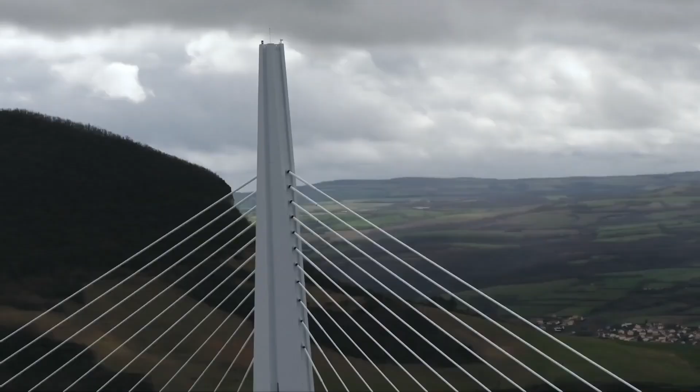After only 3 years of work carried out by almost 600 people, the completed bridge stood majestically above the gorge of the Tarn Valley. It was opened on December the 14th, 2004 by then-President Jacques Chirac, a proud memory for Michel Virlogeux. What really touched me about the occasion was when President Chirac got out of his car, looked at it and went, "Oh, that was fantastic."

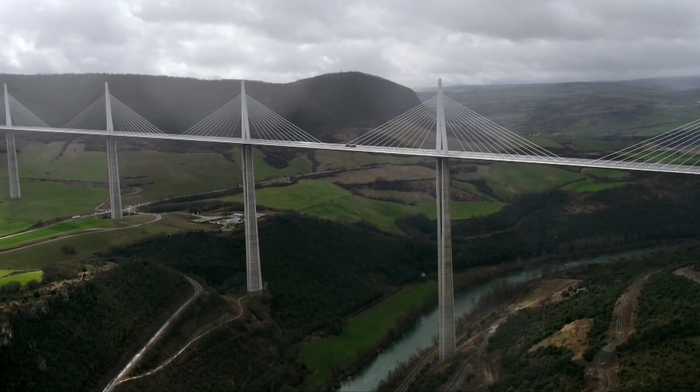Beauty and efficiency. You need the two. And that goes back to the principles of Vitruvius 2,000 years ago, which are utilitas, firmitas, venustas. Utilitas is usefulness. A bridge must have a purpose. Firmitas is resistance. A bridge must hold and it must be long-lasting. And finally, venustas, which is beauty and elegance.